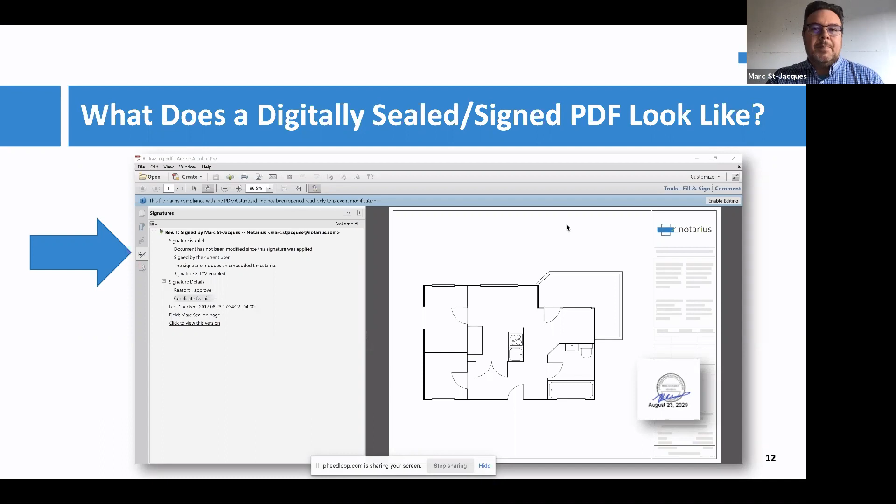Once that digital signature has been placed, it is sealed. Cryptographically, it is sealed, and you can layer more signatures on top of it, like a sheet of glass. However, you can't alter the source content. It is locked or blocked, whatever way. And if I wanted to alter it, I could take a sledgehammer, break the glass, but at that point it isn't sealed anymore - we're back to a copy.

So mechanically, a digital signature secures or tamper-proofs the data. On the other hand, how do I trust that this is marked? I can see a whole bunch of detail that the signature is valid, it hasn't been modified, it's signed by the current user. It includes an embedded timestamp, a way to confirm the moment at which that transaction took place. And I can see that it is LTV enabled - long-term validation enabled - meaning we've embedded all the elements of proof to demonstrate that even without a digital signature 5, 6, 7 years from now, it has all the embedded proof to demonstrate that. If I look at the certificate details, this will bring up the DNA of my digital signature.

Here I'll find, in my case, it says Notarius and my name. In your case, it would say AALA, it would give your name, it would give your designation, likely a member number. So pretty much everything you're going to find on a stamp or whatever you're using to identify yourself on documents, that DNA is going to be in that digital signature. It's the combination of those two elements that makes a document official for landscape architects.

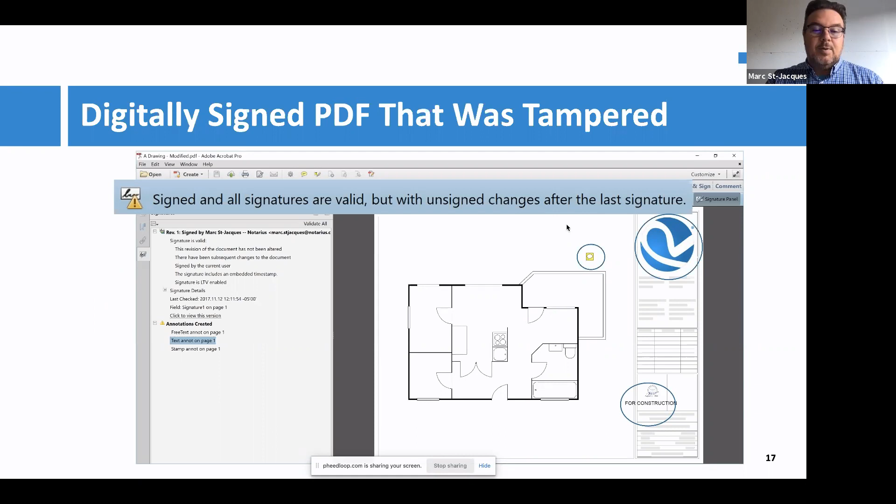If I open up the side panel, I can see that annotations were created - there were 3 elements that were there, and I can see that it was signed. So I'm taking only responsibility for the part prior to these markups and red lines. If I wanted to peel back those layers, I could just click to view this version, which would remove all the annotations and bring me back to the PDF.

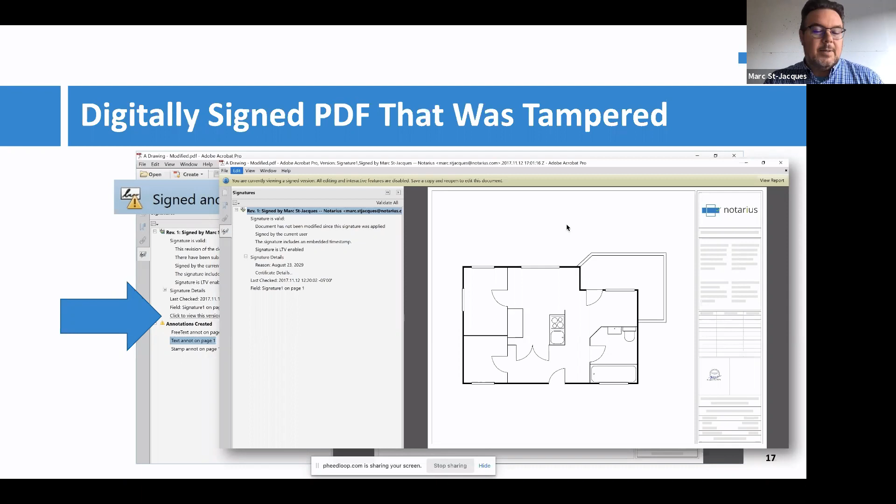So even though we often perceive the PDF as a flat 2D file, it actually is a digital format that has a whole bunch of different pockets with different use cases and benefits, whether it's to enter metadata or other sources of information such as this. In this particular case, I've been able to remove the annotations.

For some of you, there may be a need to sign data, and I'll just cover it in a few slides - my purpose for these slides is to hand them over to you afterwards. It is possible to sign data, CAD files, pictures, Excel spreadsheets, and I'll show you that in a second. Hopefully we'll have time to demo that also, so you get an idea of how you could assemble documents that may include native CAD format files. So how do I do that?

Well, two parts. I can do it either as attachments within the PDF, and that's what we're going to demonstrate, or there's also a feature called a portfolio. A portfolio allows you to add files, PDF or other, into a binder, a portfolio.

Now, of course, this binder, just like a paper binder, would allow you to remove documents and put them back in and replace them. So there's no guarantee of integrity. It's really more of a container to move stuff forward.

However, if you take a PDF attachment function, you have the ability to attach files within the PDF. And if you convert it to PDF A3 and then sign it, it will maintain PDFA compliancy, because PDF A3, which is an ISO standard for archiving, will allow you to attach files—CAD, Excel, pictures, whatever—and then digitally sign the container. So now the PDF is no longer used as a flat 2D file, it's actually used as a container, and that's where we can put all these different file formats.

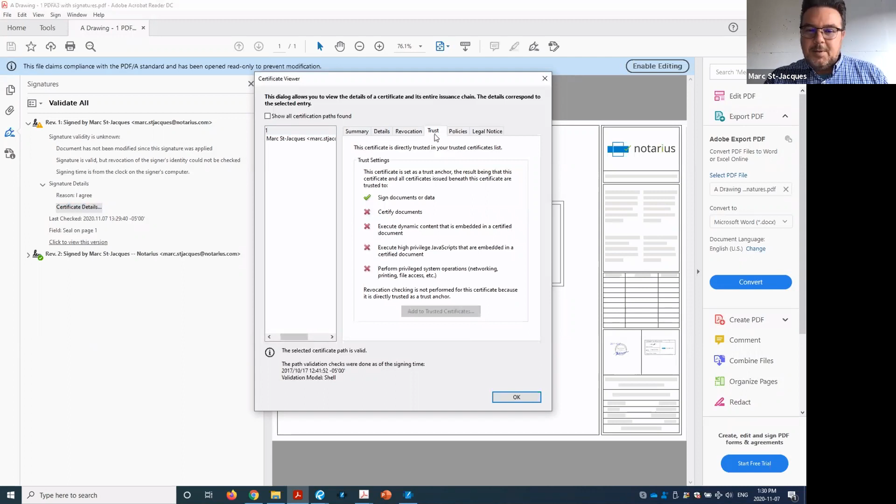Yeah, these are all trusted. I unfortunately cleaned these up, sort of did a little magic in the background, but definitely consider that it will turn green normally if you do this without playing around like I did. So consider that's all you've got to do to trust it. There's an explanation on our video for it, and that's it.

So if you want to see what it looks like, let me take you through ConsignO Desktop first of all. Maybe worth mentioning that ConsignO Desktop was originally designed for the engineering community, landscape architects and architects. We were asked to build a free PDF reader and signing tool because back in 2005, Adobe was pretty expensive and the signing feature was only available there.

So if I go over here, I can see the PDF reader. I can drill down to my demo files. I can open up a document here. So if I open up my drawing, this will be one scenario of being able to prepare and sign a document. I could convert this to PDFA if I want to.

Oh, and it's open on another page. There we go. So now that is PDFA. Now what we recommend is that you work with single sheets, and that's what we're going to do right now.

I can go ahead and just create a zone for a seal. And of course, I could have another type of stamp, but let's say I want to save this as a template, so I don't want to have to do this every time. Well, I can go here and say, you know what, save this as my drawing template.

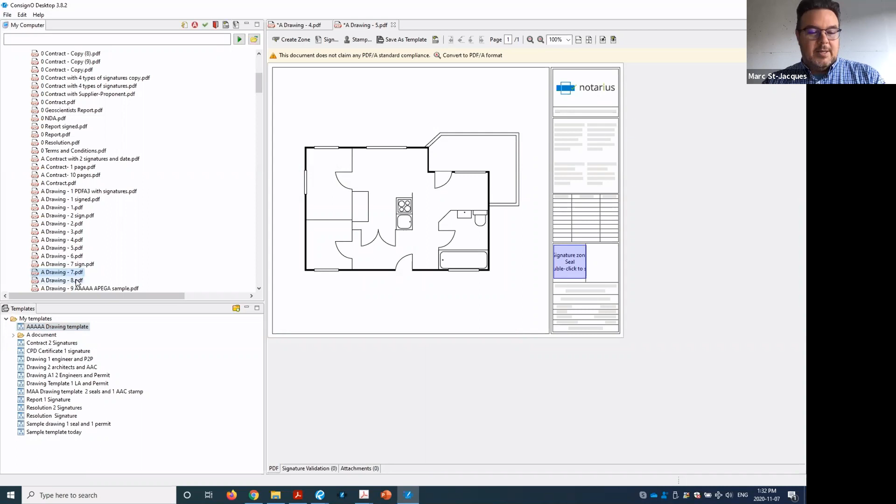And what that allows me to do is that the next time I have another document to do, I could just take the template and drag it across and apply it to that document. So of course, I don't want to have to do this with every one of them. So I can take a batch of files, with the right click of my mouse here. And with the right click, I can do a whole bunch of things, including batch apply a template.

So this is one of my many templates, but it's the one we want to use. And I have now placed it. So I've done it for 2, but it could have been 3, it could have been 10. In our case here, we're going to go ahead and take this document as an example, drawing 5.

And I can go ahead and sign it with the sign button over here. I can double click to sign, I can right click, and all 3 of them will start the signature wizard. So at this point, I have my signature wizard. I can see my digital signature over here.

I have a few different signatures. If you practice in other jurisdictions, you'll see that in parentheses it'll say the association, like OALA and things of that nature. So you'd have all the different associations show up if you had a digital signature for each. I'm going to keep this one here.

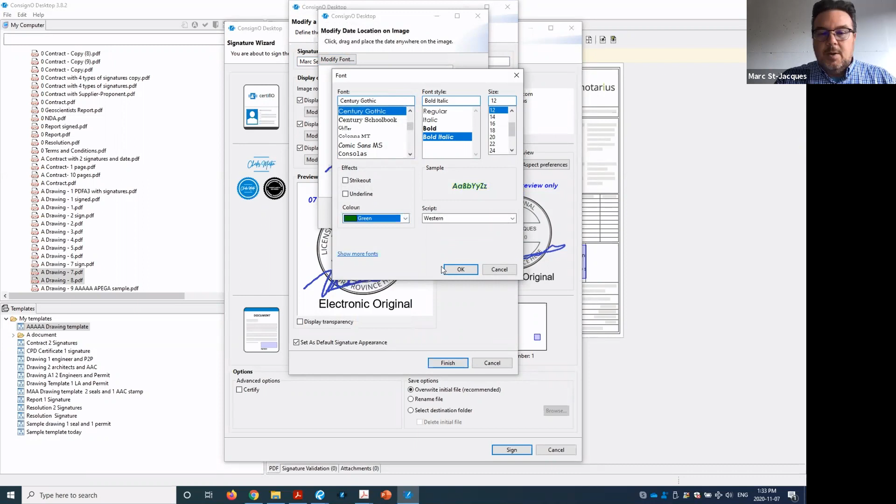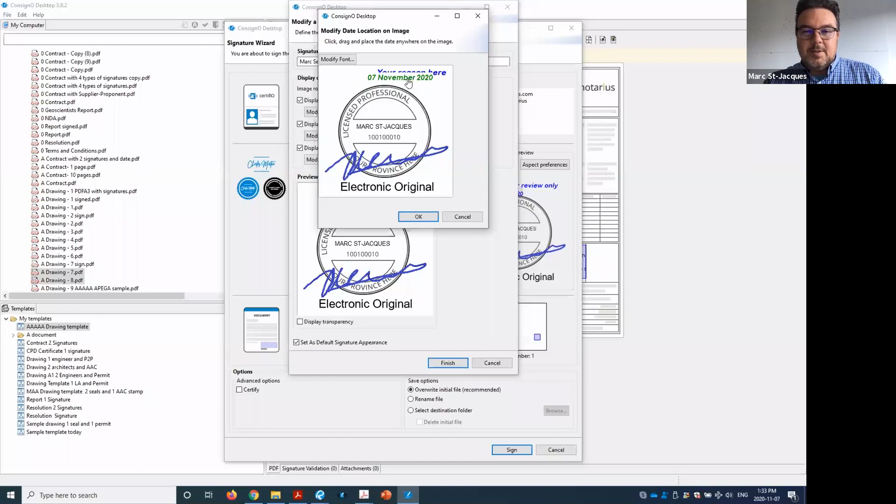I have a default seal. This seal can be modified - not altered, but I can modify the date format, the location, and the color. To me this is really the important element, because it gives you a lot more flexibility than you would normally have with Adobe and Bluebeam. This is a bit low, so I'm going to make this a bit cleaner to read. There we go.

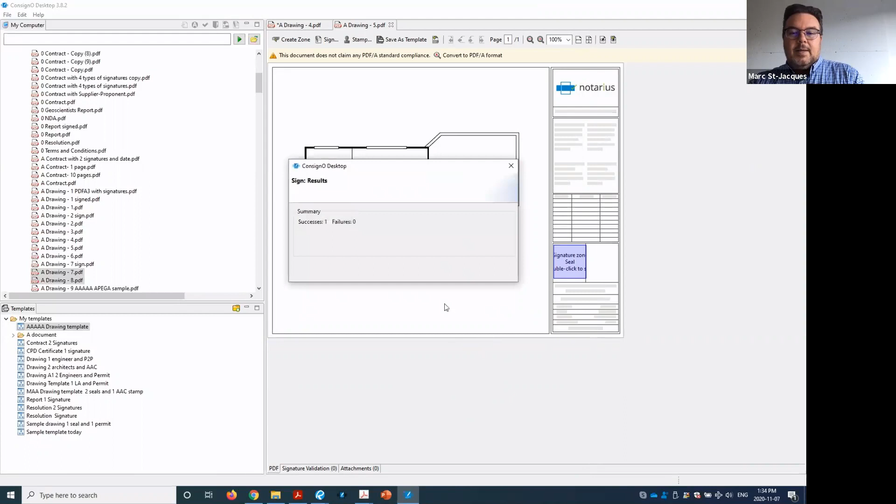At this point I can put custom text where I specify electronic original, and the zone I want to sign is seal. So at this point it prompts me for my password. And now I have digitally signed this document.

Now, if I wanted to take a set of drawings and batch sign them, I don't want to have to open each one. I realize there may be some discomfort with some of you regarding batch signing, but consider that when you're in an office stamping individual sheets and signing corners - the idea here is that batch signing is designed for when you're done with the entire package, so you're ready to sign it. This doesn't take away your responsibility to review the work you're signing or sealing, but the batch functionality can make your life a lot easier.

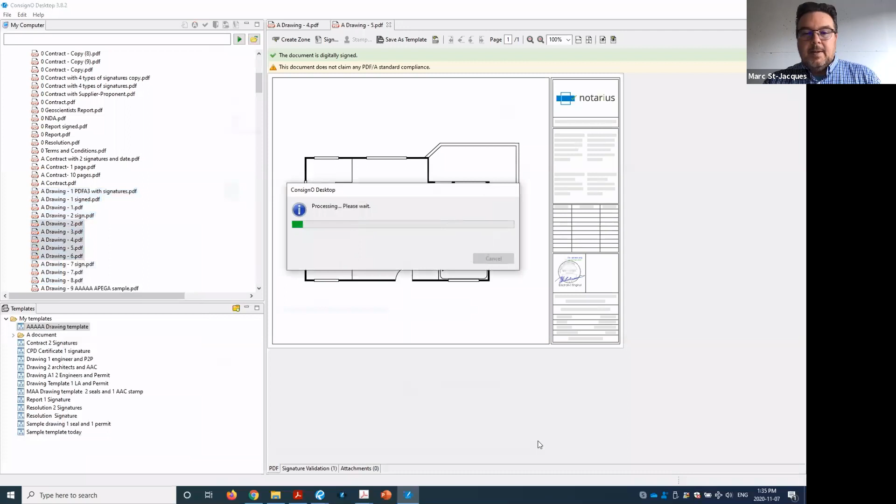So I'm going to go ahead and, for example, take these. Again, I'm prompted to have my signature here with this seal. I won't remove the notion of 'for review only,' I just want to leave it there. And of course my signature is active, it's in an active session, and it's signed once successfully. It did not find a zone called seal in other documents.

That was my purpose here - to demonstrate that you can take a set of drawings, and even if your name was only on 1 of them, it would only apply the image of your seal and digital signature on that particular document that had the zone called seal. So you don't have to worry about your digital signature being misplaced or placed inadvertently onto another document that didn't have a zone predefined for it.

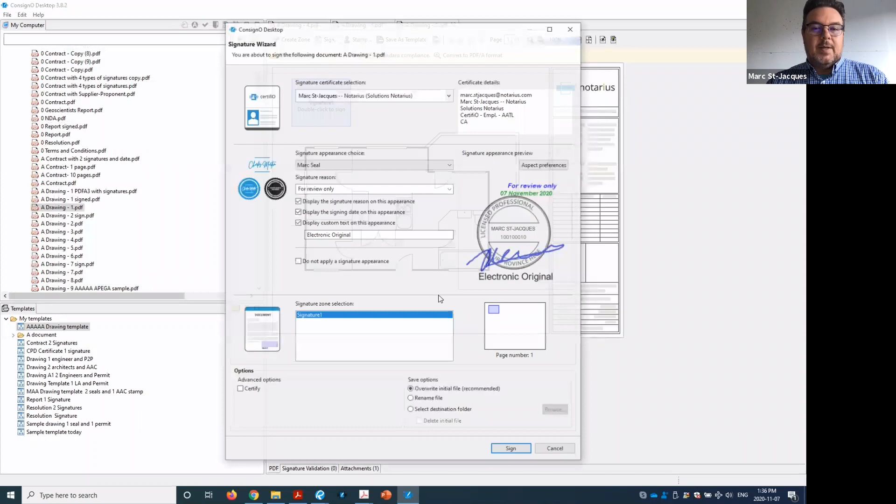Maybe one last thing I can show you - if I take this example, I have a drawing over here, and we talked about attaching CAD files or other file formats. I can come over here and click on Add, and I could decide to add this picture as an example. Of course this could have been anything else, but you get the idea that you can add your things here, and then I could create a zone to sign the document, which is pretty straightforward. So there we go. Now this document is digitally signed, but it does have the attachment, and you can open up these attachments elsewhere. These are some of the features that are really interesting for ConsignO Desktop as far as batch functionalities.

To push this a bit further, when you right click you can close one, close all, or close tabs. This sounds a bit simplified, but if you're working on a set of 15, 20 drawings, this is really helpful to manage this information. I'm going to go ahead and close them all.

I'm going to go through the preferences for you. We've got plenty of time. What I'd like to do is maybe just focus on a few things of interest to you that you may not be aware of.

So what we tried to do here was address requirements for date formats. In certain jurisdictions there's a requirement to have a date format that is day, month, year. By default, ours is ISO - year, month, day. But if you had to write out the month completely, this is how you would do so, partially. You can choose the date format you want and set it as your default, and moving forward that's what's going to appear on all your documents that you sign. The other thing that might be of interest - over here you can choose your default certificate.

So let's say you have 3 certificates, but you can choose which one is the default one that's going to always appear. The save option, we tend to recommend to just overwrite the initial file for efficiency's sake, especially if you're batch signing, but you can rename them if you want. You could also choose to always go to a destination folder. Those are options that are available, but I would leave that as is.

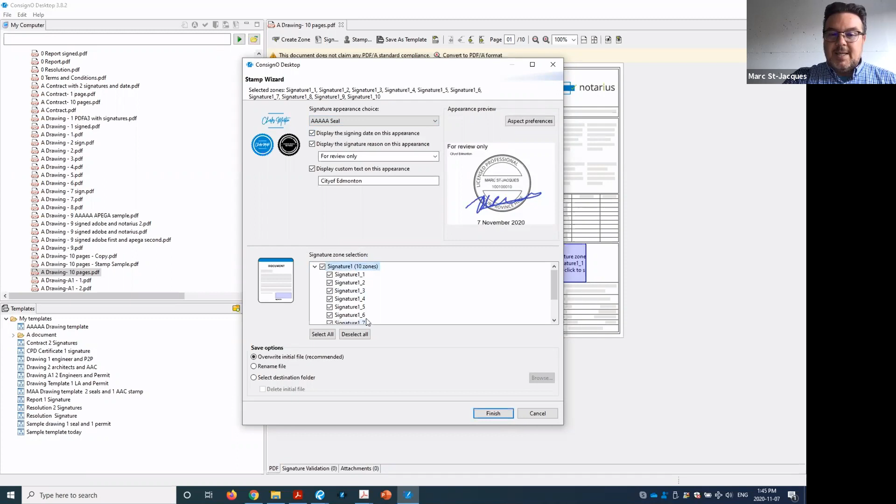At this point, I want to click on the stamp button, which gives me access to all the different images I've created. I choose which of these I want to stamp. Now, it's important to specify that stamping is not signing. Once I click Finish here, all these images have been placed on all 10 pages.

I could have moved the zones around, and I could create another zone and apply it, let's say, on just the first page. There we go. So now I can go back to the first page - I've got my zone here for a signature. At this point, I could create another zone, and I'm going to do this on purpose.

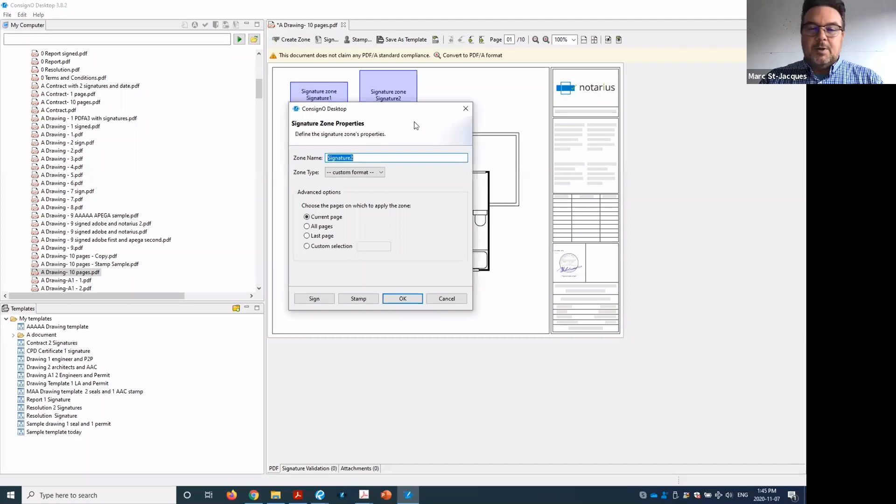I'm going to go ahead and sign it now. So I'm ready to sign this document - it has my signing certificate, I have my image here. I'm satisfied, so I go ahead and do it. It is now digitally signed.

At this point, notice the stamping button is grayed out - be aware that from the moment you apply one signature, these zones can only be used for signing. Until you have one signature, zones can be used for stamping, electronic signature, or signing - one or the other. But once you have one digital signature, that's just something to keep in mind.

The last thing, just as an FYI - you may want to have a 10-page document where you draw the same box and sign each page individually. I really do not recommend that. If you are to stamp, go ahead and then sign, but I definitely would not apply a digital signature to each individual page. The example I'm going to do now is just taking these documents and merging them.

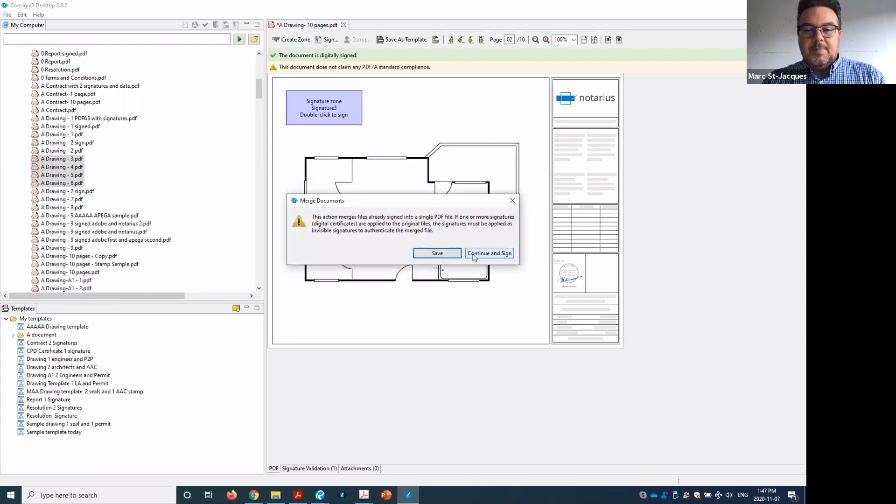I merge them - I can choose to merge these. These were signed documents, and I can save it as a copy and then have other documents added to it. Or I can continue and sign this new merged file with an invisible signature, because there's no zone for it. That will go ahead and sign this new document.

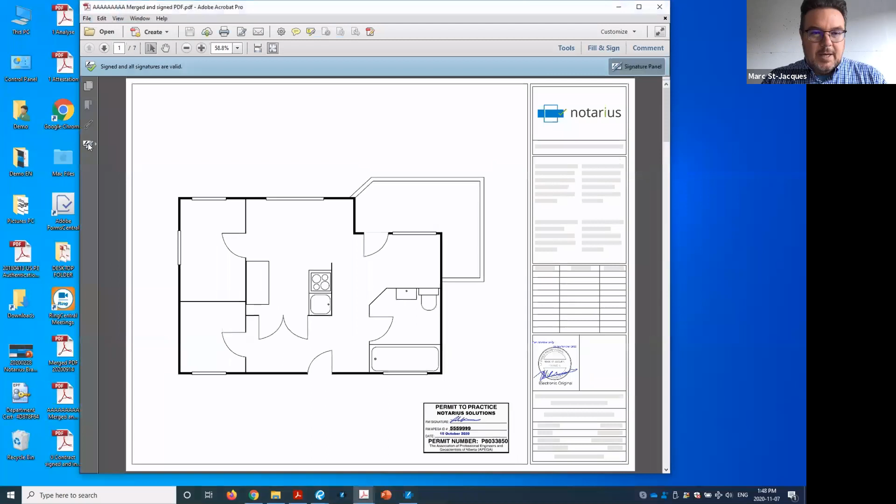Well, this would be the same example, by the way. I do have the digital signature over here. Actually, tell you what, let's - I'm not finding it on my desktop.

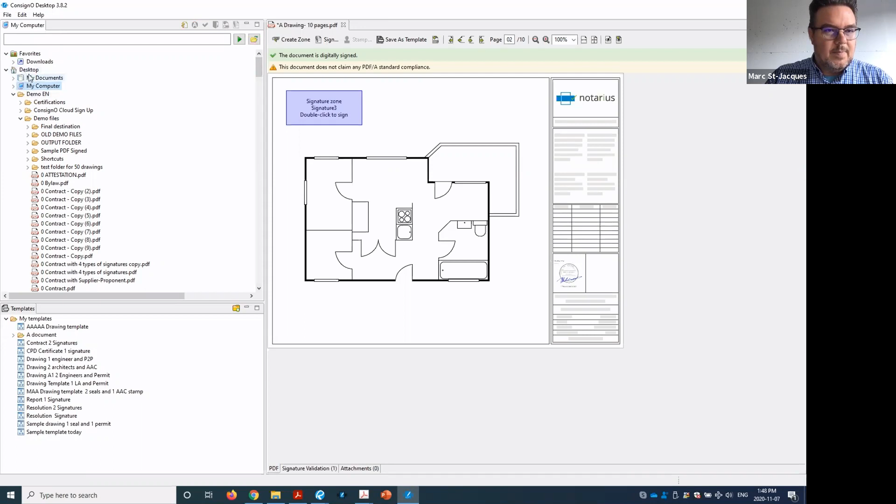Yeah, I may not have saved it in the right spot, but it is digitally signed. So let me just do it again. Let's do it a bit differently.

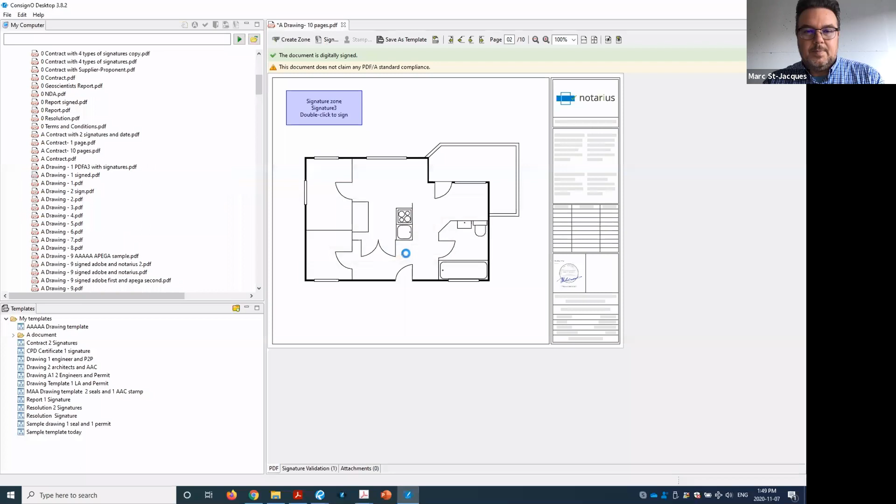I want to show you one more thing before we move on to the last part with Bluebeam and Adobe. So I have here a set of drawings. I'm going to close Consigno Desktop right now.

The software is closed, and I can take a set of documents. With a right click of my mouse, you'll notice Bluebeam has a few features here with combining files, and Adobe has a few as well. Under Send To, you have the most common features of Consigno all available with a right click.

I bring this up because it's really important that people understand that once you've configured Consigno Desktop, you could, in theory, never open it again. You could choose to do everything simply with a right click of the mouse. I could batch convert to PDF/A, batch apply a template, batch stamp and sign.

We even have a button called Combined Actions, and this will do everything in one single swoop. Literally, this will convert to PDF/A. I'll have to change to a drawing that is A1 size, so I've got it over here.

I want to put the image of my seal here, under the zone called Marc Seal. This is going to batch convert all these documents, batch apply template, and batch sign, all in one single action for these 6 documents.

This is really where I find the biggest magic is when it comes to Consigno Desktop, is having the ability to do all of this in one single operation.

And it's going to go ahead and sign all these documents. Now, of course, once this is done, it's telling me that this was successful. How do I know which one is signed and which one isn't?

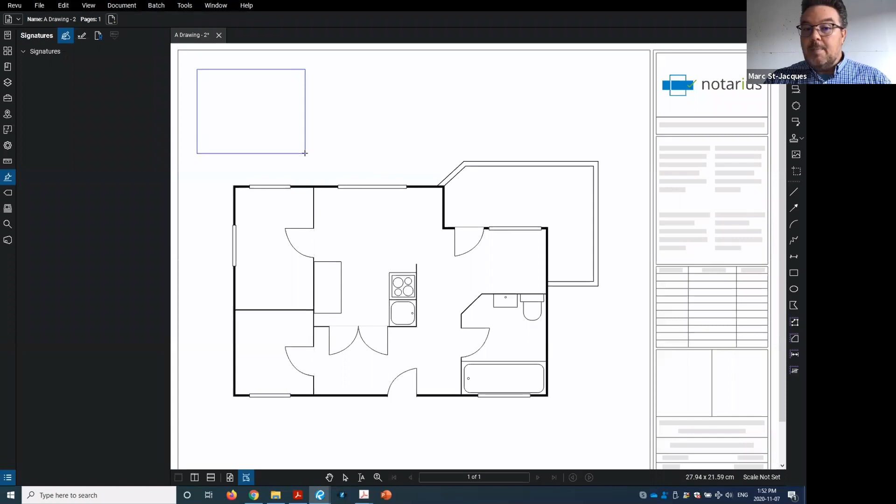There is also the ability to do file attachments like I showed you in Consigno Desktop. And of course, signing would be something like this, where I click on the sign button, I draw a box, and at this point my signature wizard will look like this. I would see all my certificates.

Now, in the case of Bluebeam, they'll even show me my self-signed certificate. So my fake ID, Marko Fako, is over here, but I'm going to use my notarius signature.

And of course I've got all these different appearances that I could build. In my case, I'm just going to use this one here, which is the image of my seal. And when I click on OK, it's going to prompt me to save it.

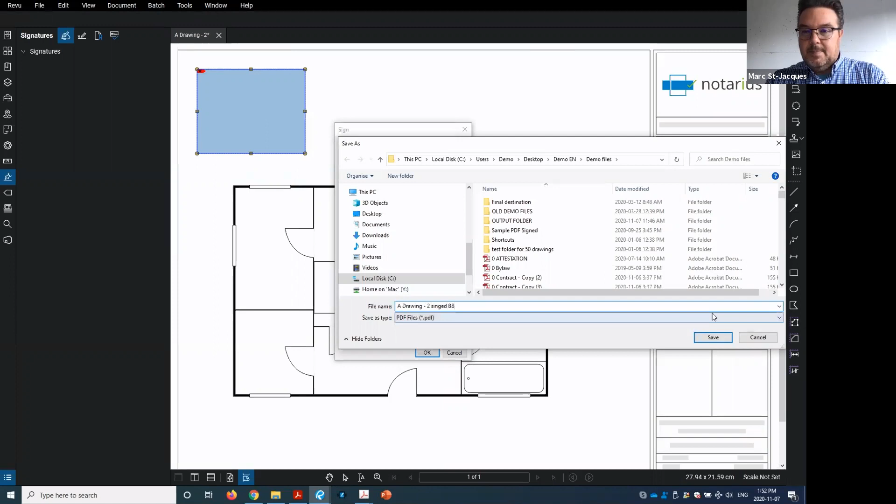I'm going to give it a second. It'll prompt me to put in my password. And now it is digitally signed. So visually, you can tell it looks pretty similar.

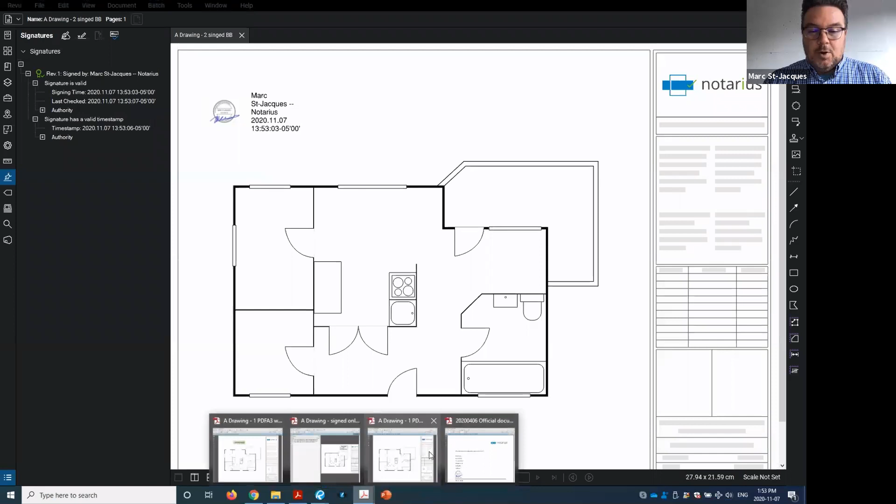If I wanted to do the same exercise in Adobe, let me take this document here. This is an Adobe document. Actually, no, let me do this in Reader DC, the latest version, because the other one is an older version you likely don't have anymore.

So in Adobe Reader DC, our zones will appear. If you do create a zone in desktop, it will appear here. However, to get to sign, this is a bit more complicated.

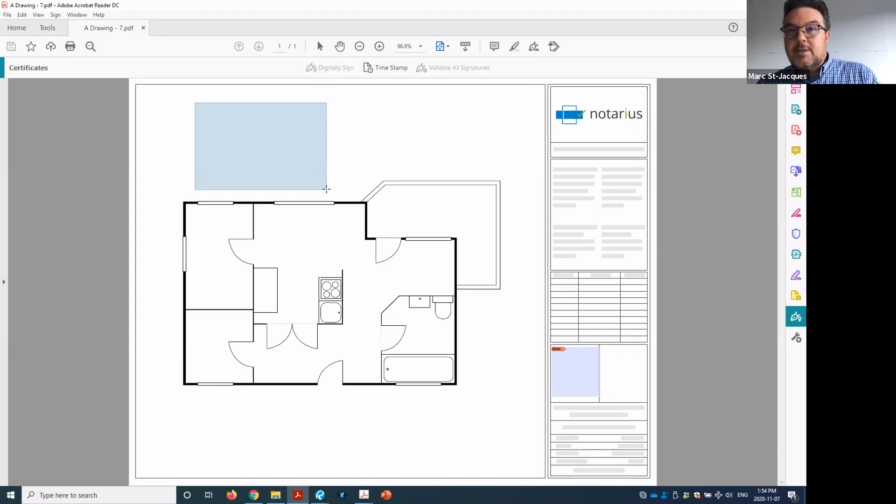If you use this sign button, that's actually just an electronic signature—it's just a picture. To do a real digital signature, you have to go under More Tools, then Certificates, and digitally sign by drawing a box, just like we did in Bluebeam and Consigno Desktop. The screen looks a bit different here, but the concept is the same.

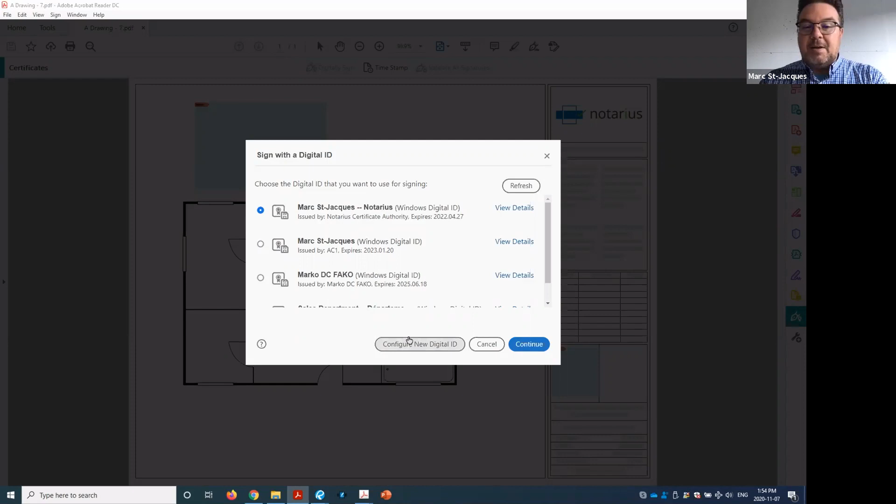It'll ask me which certificate I want, so I'll use this one. This is very similar to the other tools, and remember these certificates are in your Windows Certificate Store, so they'll appear in any PDF reader. I did nothing special to make them appear here—this is part of the standard, so there's nothing to configure. Generally it finds it right away if it's in your Windows Store, and ours would be out of the box. When I continue, I've got a signature zone.

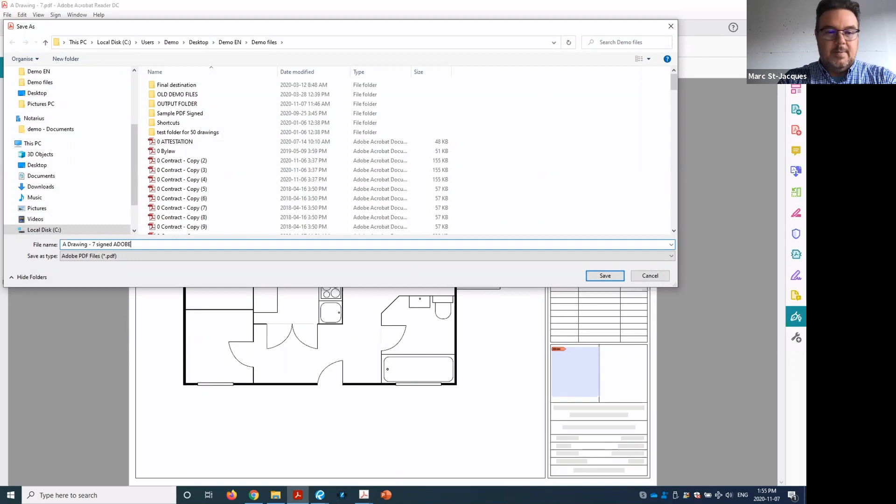That's just a simple signature with a bit of text. I also have a seal zone and an approval stamp. So you've got these options, but the ability to move text around, change color, texture, and so on is a bit more limited. The mechanics are about the same though—when I click sign, I'll be asked to save the file, then it prompts me to put in my password, and it goes ahead and applies my signature.

So I went a bit quick, and I can appreciate that was fast. I wanted to make sure to at least cover the basics of how you could prepare and sign with different tools. I realize that raises some questions.

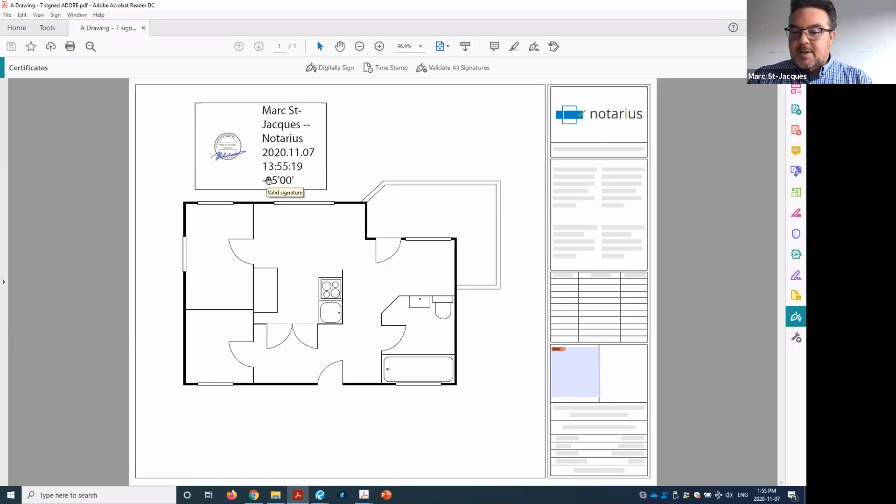Maybe to wrap up on this part, I also have the link to verifio.com. Let's say you have a customer who wants to verify a document but doesn't know how to validate or trust it—this is an option. If I look at the demo file and take a signed document to check it, I have one here signed with a digital signature from Notarius and a self-signed certificate from Adobe. So when I upload this document...